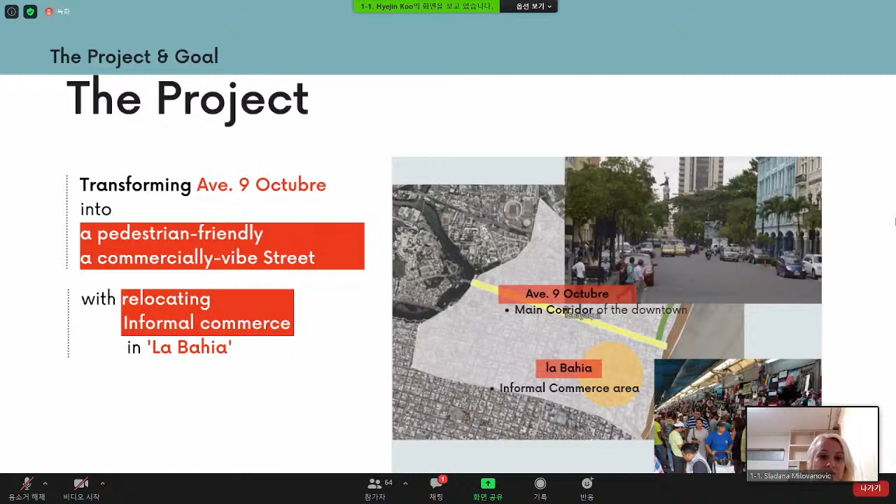The project is transforming the street into a pedestrian-friendly, commercial vibrant street with relocated informal commerce in La Bahia. The street is the main corridor of downtown, connecting attractions, companies, and administration buildings.

Project background: Guayaquil is on the coast of Ecuador, South America, and is the most important port in America, with a population of around 3 million people in 300 square kilometers. It is the main economic resource and financial center of Ecuador.

Guayaquil is a traditional harbor with vibrant commercial activity. Inefficient governments in the 80s and 90s generated urban problems: no institution, no urban planning, corruption, informal settlements, and informal commerce.

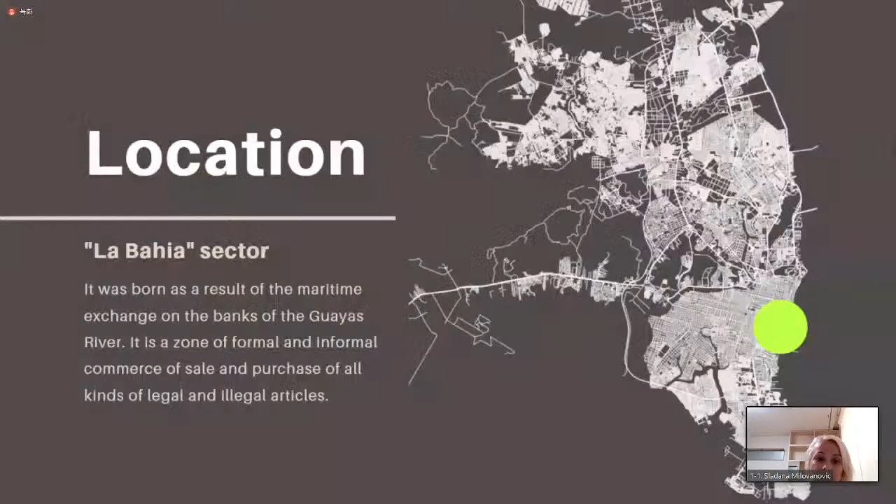In this context, La Bahia is a street informal market that occupies a large part of the city downtown. Our location is in the center of Guayaquil city, precisely in the La Bahia sector, near the Guayas River.

La Bahia is a zone of formal and informal commerce, selling all kinds of legal and illegal goods at very affordable prices. La Bahia is also located in the middle of the attractions in the central area.

The problem is that La Bahia's center has been losing its commercial value over the last decades, facing the advance of new zones of higher added value, making it necessary to revitalize this area. The idea to pedestrianize the downtown to enhance its tourist commercial value has long been supported by the municipality and the public.

There have been two successful regeneration projects in downtown Guayaquil. The first is Malecon 2000, a 2.5 kilometer riverside promenade with a cultural neighborhood including museums, galleries, and a shopping center. The second is Malecon del Salado, on the other side of downtown Guayaquil, a riverside park with a boardwalk and playground.

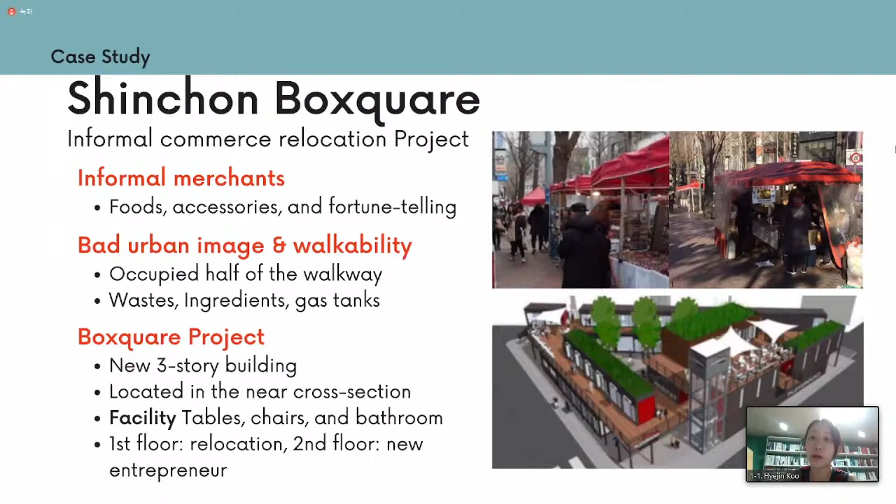We studied some Korean examples. The first one is the Shinchon Boxquare case. After relocation of informal commerce from Ewha Street, the area became more walkable and it allowed informal commerce to be more competitive. The second study case is the Yonsei-ro case.

The Sinchon area was depressed after Hongdae took on a young and trendy image compared to Sinchon. The research was successful: more people came to Sinchon, shop owners' revenue increased, and the number of car accidents sharply decreased.

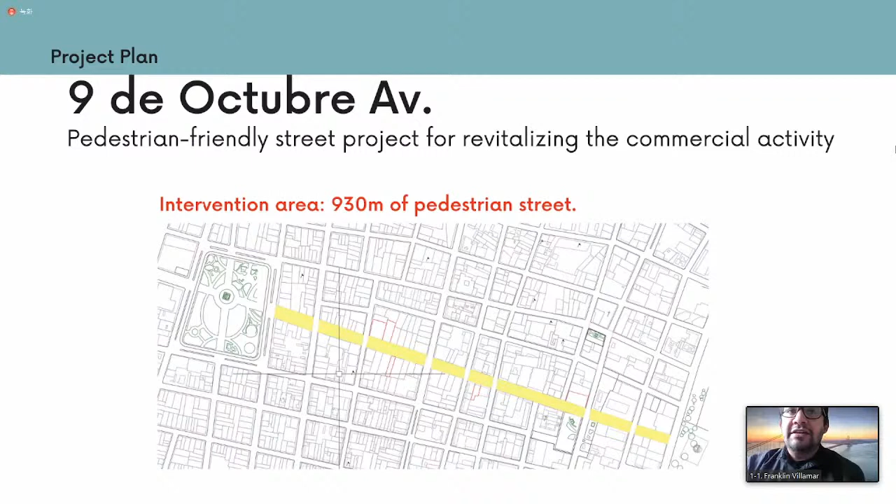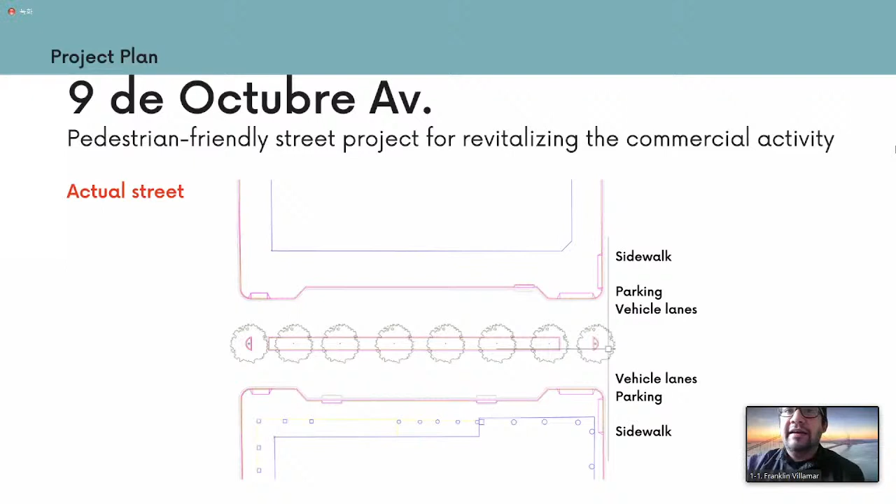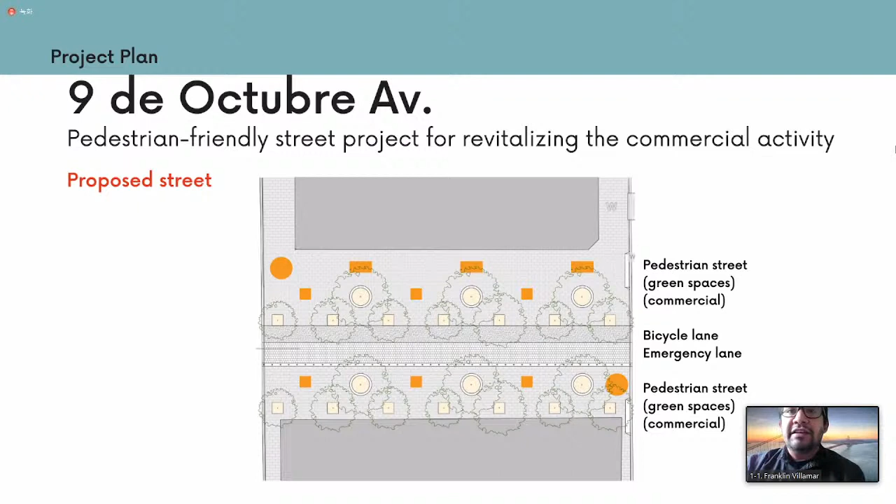This is the new distribution as a new pedestrian and walkable street with green spaces and commercial kiosks, bicycle lanes, and one emergency lane.

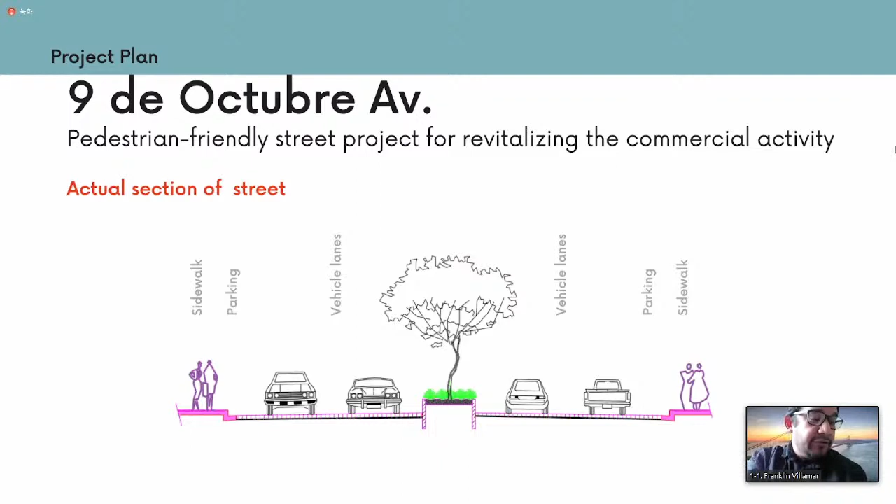This is the actual section of the street, which is a typical vehicular street. And we intend to make a new type of section.

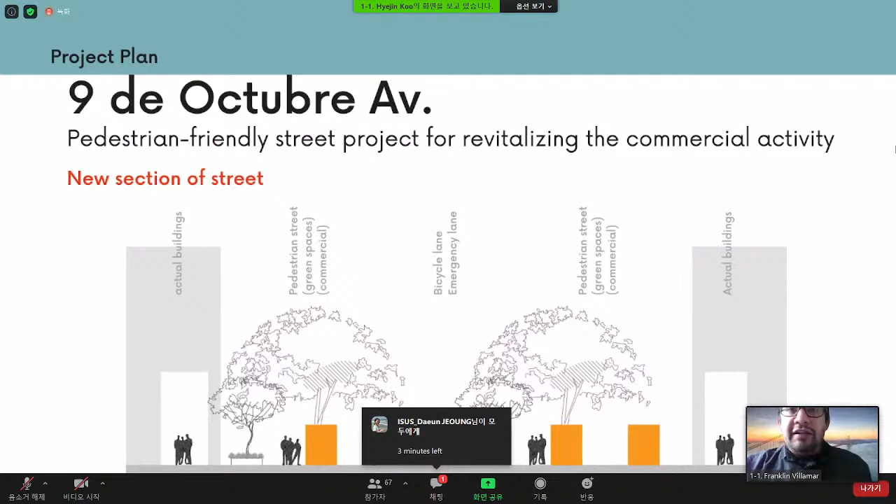Which places strong emphasis on the recuperation of green spaces and new commercial types. These are colorized sections of the new streets.

And this is the kiosk that we are trying to implement in the new commercial area for the merchants of the Bahia.

This is a brief budget that we present to you. The cost of the project is around $2,500,000. We intend to serve in the first stage 160 merchants, and the average rent for each kiosk is around $80. As for the rest of the values, we intend a return on investment over a period of 10 years, not only through the annual rent from the merchants, but also through the legal betterment levies tax, which allows the municipality to impose taxes on the inhabitants served by the project.

So the final goal of our project is to transform the city downtown into a pedestrian zone which serves urban commerce through a network of pedestrian avenues. We are using the super block concept, like in Barcelona.

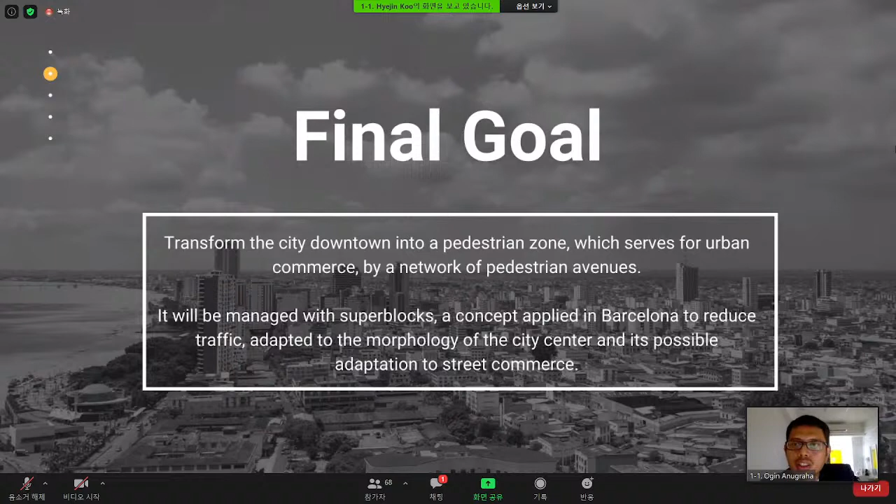And this is the super block that we propose for our project. The super blocks project represents an innovative planning approach for addressing urban challenges such as mobility, public space, biodiversity, and social cohesion.

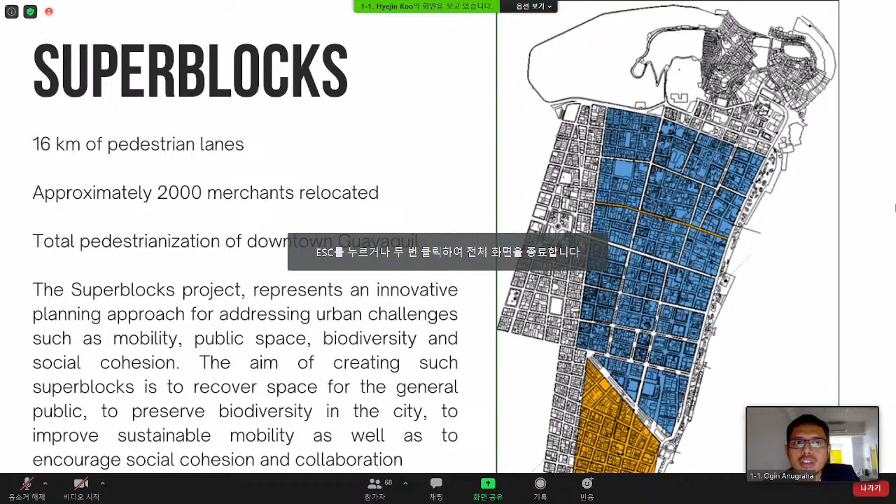With this concept, 2,000 merchants will be relocated, and it will also improve 16 kilometers of pedestrian lanes. Our vision for this project is to transform it into a pedestrian-friendly and commercialized zone. Thank you.

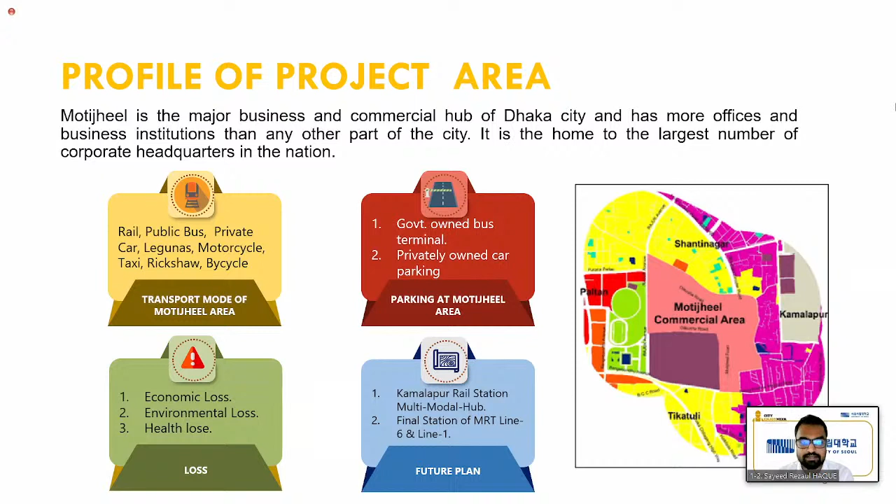So government has plans to build a multimodal hub at Kamalapur railway station, the end station of Metro Line 6 and Line 1. This will also increase the demand for parking in that area.

So to mitigate these areas' parking challenges by developing a multi-storied parking facility, our objectives are: increase the parking supply, safe and secure parking facilities, and reduce traffic congestion. The project will be developed by Dhaka Transportation Coordination Authority, and we hope that it will be managed and operated by Dhaka South City Corporation, because this area is located in that city corporation.

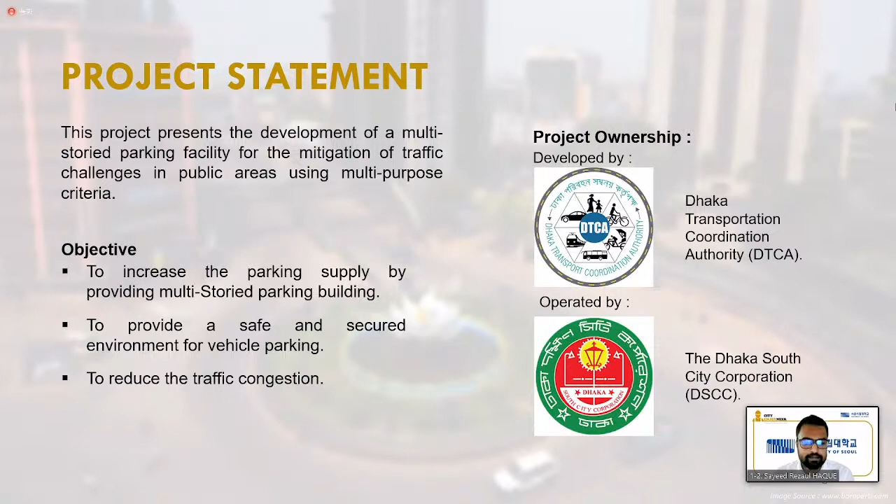Japan has advanced automation technology. Multi-storage parkings and bicycle parking facilities are very well established. Automated parking facilities entered practical use in the 1960s. In Kuwait, this is the largest mechanical parking lot in the world, located in Al Zahra. It has a parking space 3.5 times the size of the parking tower.

In Korea, I use this smart parking and I have to pay 1,000 won per 10 minutes. I think it is located in Gangnam, so parking fees are expensive. As an advantage, it is a parking lot designed to park the vehicle by rotating the cage, particularly left and right, after the vehicle enters the parking lot, usually called vertical rotary. It is easy to install in a small area and has few ports because it is a simple circular circulation method. It is very simple to use and can be operated by the driver without a separate manager. It is easy to move and reinstall the parking lot, so it has a very high efficiency value compared to the narrow area. Septian, please.

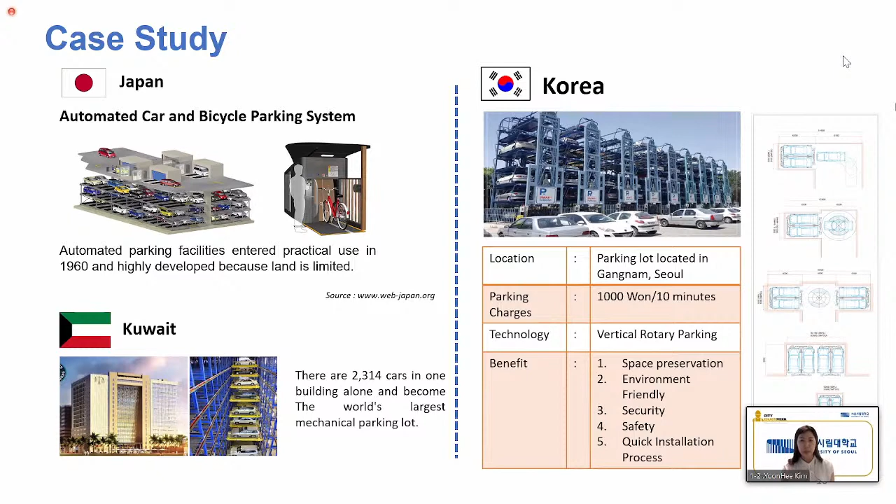Yes, thank you, Yoon-hee. I will continue the presentation about the concept plan. We will develop this parking in Motijheel CBD Dhaka with the integrated smart parking concept. We have four main concepts.

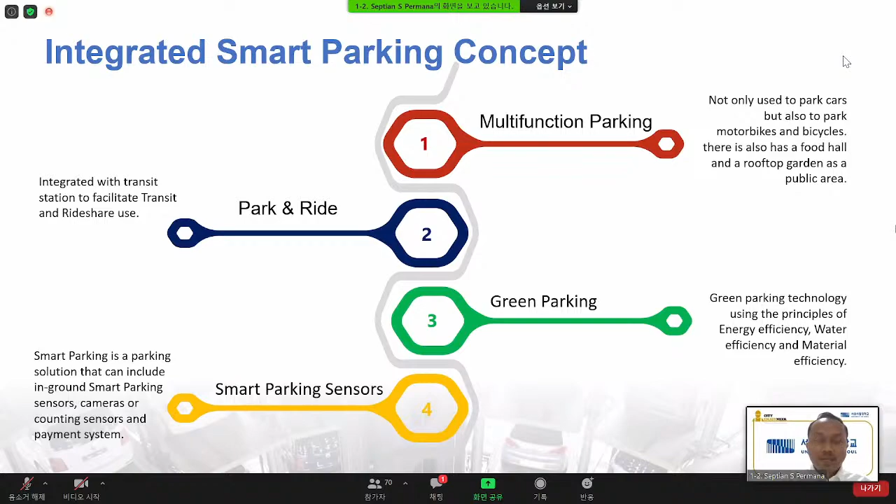First is multifunction parking, not only for the car, but also for the motorcycle and bicycle. Also, we will develop a public area, like a park. The second is park and ride. This parking is located between stations, so we will use the park and ride concept integrated with a transit station, and green parking using green building technology.

And the last one is smart parking sensor. We use sensors for counting the availability of parking slots and also for the payment system.

We will develop this concept with several implementations. For multifunction parking, we will develop parking for cars, motorcycles, and bicycles, and we will construct a rooftop park for public area and also a food hall for developing the local economy and community, along with park and ride. The location is between public transportation and the CBD, and we want this parking to become an important facility for making things easier for people.

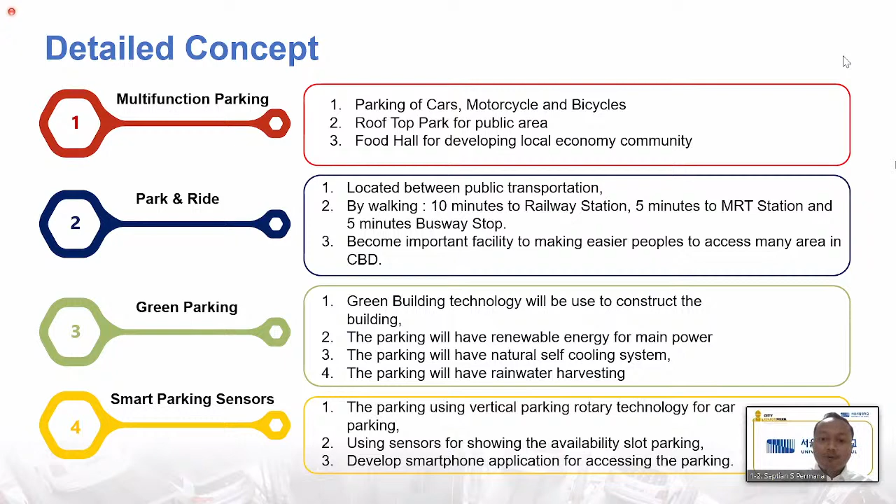Green parking: we will develop this parking with green building technology, with renewable energy, a natural self-cooling system, and rainwater harvesting. The last one is smart parking sensor: we developed the parking using vertical parking rotary technology as in Korea, and second, using sensors for showing available parking slots and a smartphone application for accessing the parking.

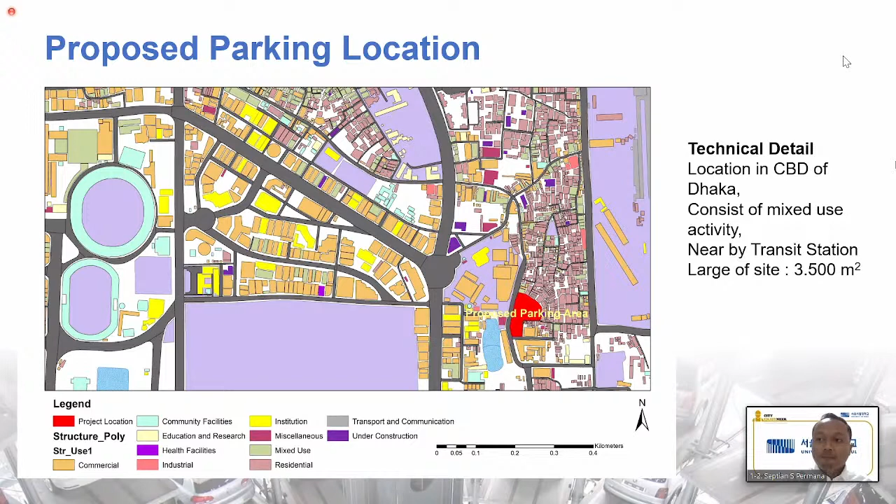This is the proposed parking location. As you can see, the red one is the proposed parking area located in the CBD of Dhaka, and the site is 3,500 square meters.

This is the design concept. We will develop the parking with 4 levels of car parking, 1 level of motorbike parking, and 1 level of bicycle parking, using vertical automatic car parking technology.

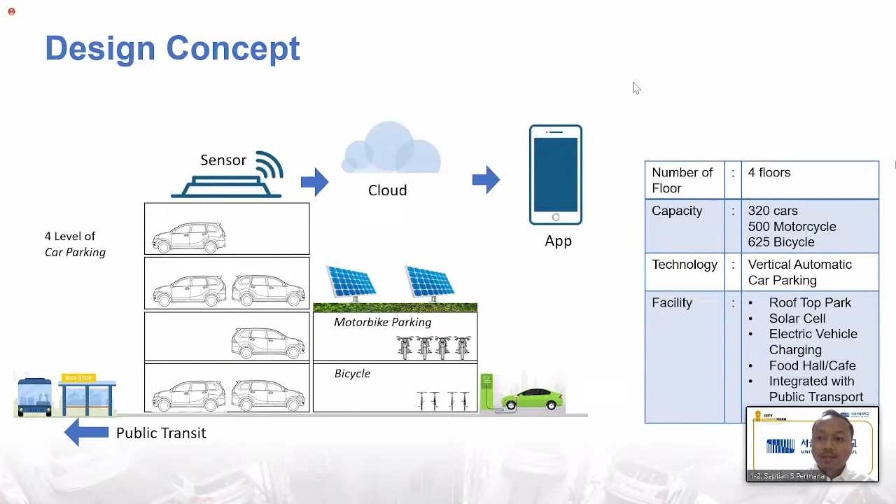For the financial analysis, Souksamai will continue. For the financial analysis, from the first year to the third year, there is investment on construction cost for the car, motorcycle, and bike parking. On the 4th year, we have operations.

As I mentioned, from the first year to the third year, there is investment for the construction cost for car, motorbike, and bicycle. The fourth year is operation. But if we invest in this project, interest will be incurred starting from the seventh year.

For the project plan, we use a timeline of 5 years, starting in 2021 and continuing through. The details include the preliminary feasibility study, comprehensive development planning, working design, construction, and operation.

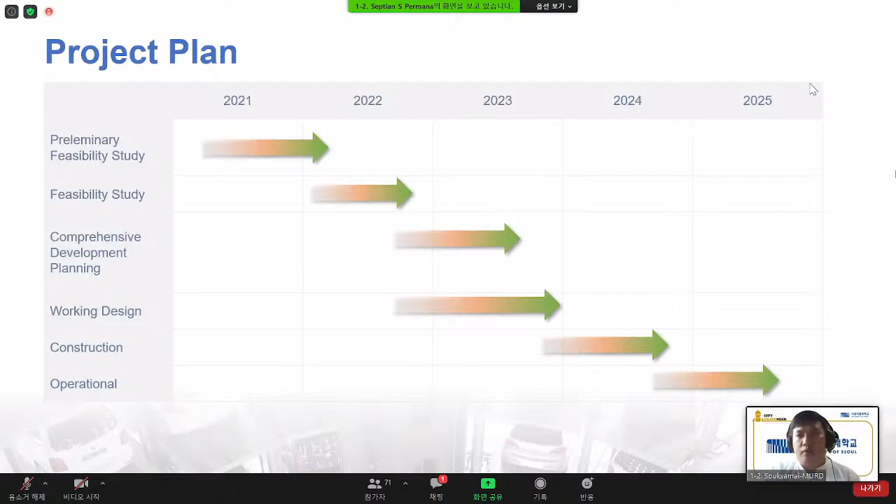Thank you Mai for your nice presentation. Now we are presenting our final outcome. Successful implementation of this multi-storey car parking will improve parking related issues, and the occupied road space will be freed. That will reduce congestion and increase vehicle speed. As a result, economic loss will be reduced, the environmental condition of the area will be improved, and it will also generate revenue for the operating organization.

This is our team photo from when we were developing this project. Thank you everyone for your kind patience and attention. Thank you.

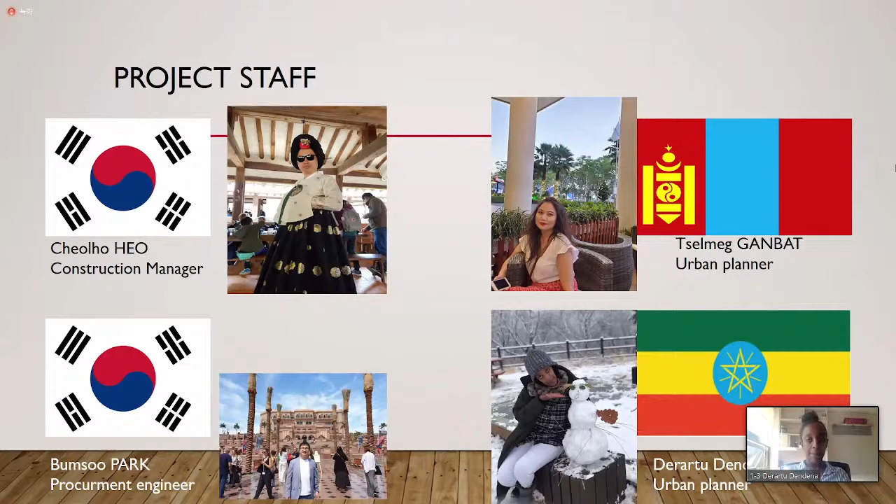Climate change has been a global topic since the late 20s, and we want to address this issue through urban regeneration. In urban regeneration, we would like to focus on the energy part, taking urban farming as a production of green energy, which is important for the environment.

In urban regeneration, among the various definitions, we have chosen to take the product of complex dynamics processes and physical, social, environmental, and economic transactions. This applies to our building.

In our building, we are going to address the economic, financial, employment, physical, housing, and social issues. Then we will design a physical building.

In utilizing unused and underused spaces, we would like to take land occupied by functionally obsolete non-residential buildings. We will discuss later what we mean by that.

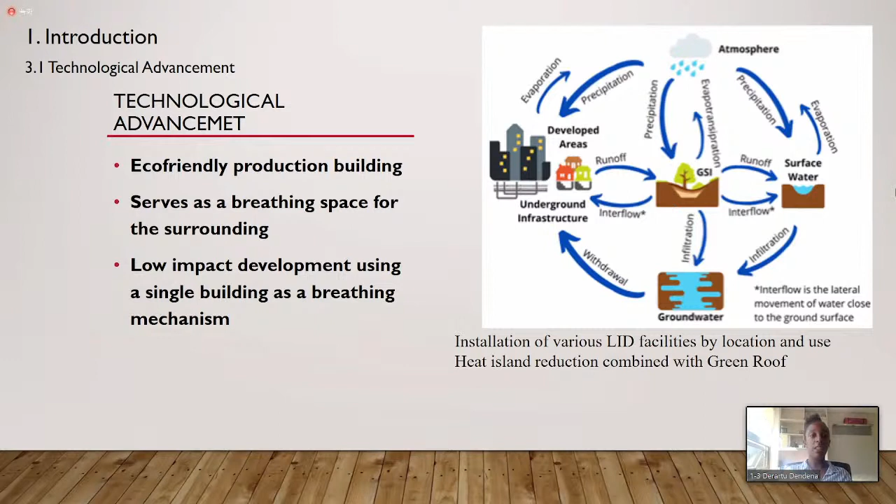We would like to bring technological advancements by using eco-friendly production buildings, serving as breathing space for our surroundings.

We would like to produce green energy, which is sustainable and reusable, to help keep the urban heat island effect down in cities. In an already developed city like Seoul, making more space for sustainable green energy is a future investment, and as we use this prototype in Seoul, it could also be used in developing countries.

The next part will be presented by my colleague Tselmeg. Thank you, Didi. Now I'm talking about this urban farming definition.

Vertical farming is the practice of growing crops in vertically stacked layers. It often incorporates controlled environment agriculture, which aims to optimize plant growth, and soilless farming techniques such as hydroponics, aquaponics, and aeroponics.

About the background and history: this greenhouse glasshouse technology developed largely in the Netherlands over the past 150 years. The concept was proposed in 1999 by Dickson Despommier, professor of public and environmental health at Columbia University. Nowadays, developers and local governments in multiple cities have expressed interest in establishing a vertical farm.

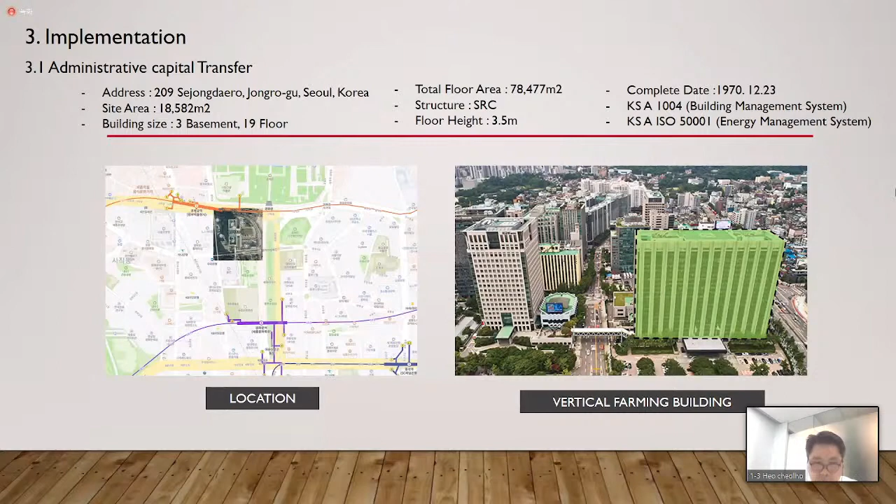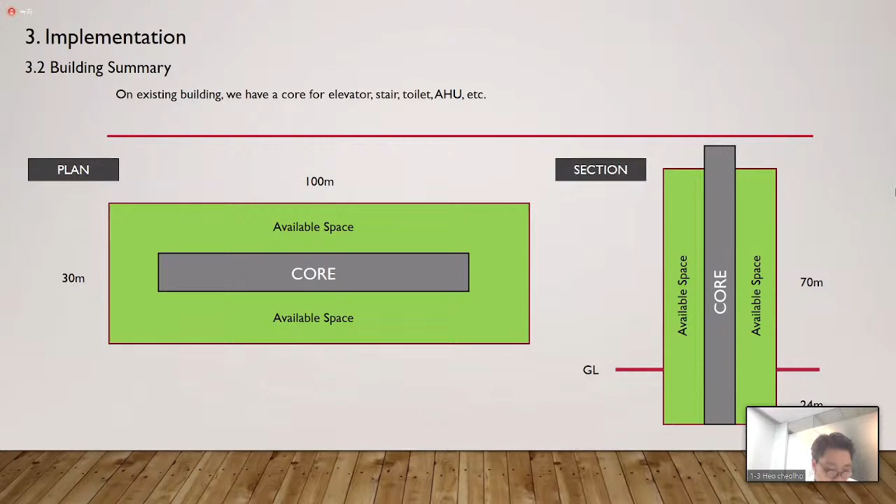If you check the 30-meter vertical section on a typical floor, the height of the available space is 2.5 meters, except the ceiling inside for MEP. The depth of the available space is 12 meters, excluding the 8 meter core size.

And the next step is to study the effectiveness analysis. Thank you. So from this page, we would like to speak about the effective analysis.

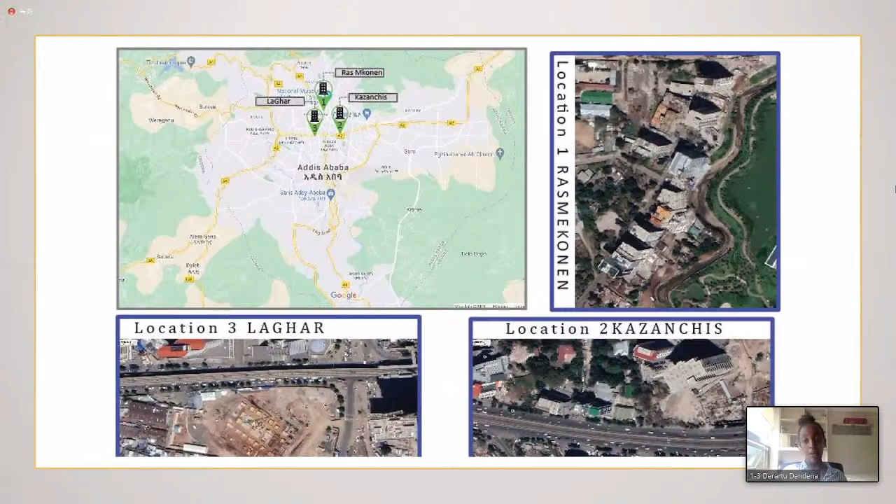We have 3 locations in the CBD area. Location number 1 is Ras Mekonen, location 2 is Kazanchis, and location 3 is Laghar. All 3 are in the CBD area and also open spaces, so we could literally copy and paste this project.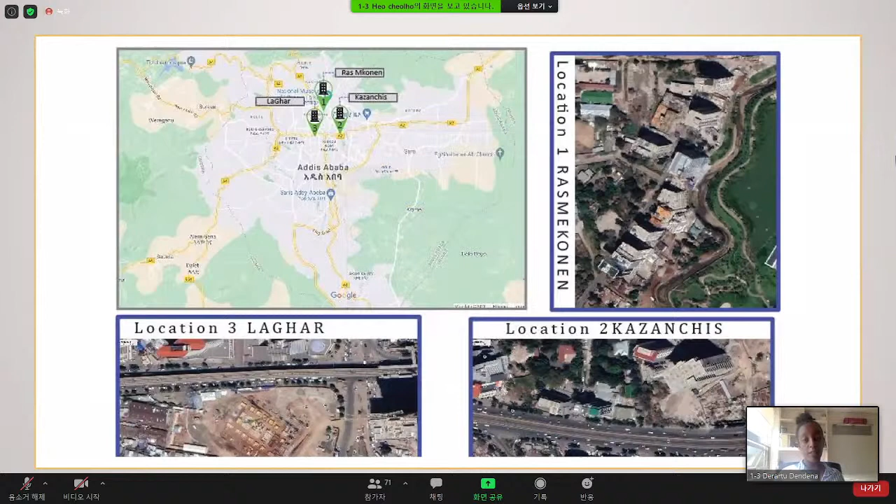We can build this green vertical farming. In conclusion, green regeneration not only regulates urban ecosystem dynamics, but also makes cities advanced and competitive. By stepping ahead, we can make our city a future city. Any city this project is applied to would be a future city.

The legal and institutional basis could be set depending on Ethiopia or any other country implementing it, and monitoring and evaluation would best be done by respective stakeholders. In our case, in Addis Ababa City, the Green Development Office would be the project owner. Thank you for your time.

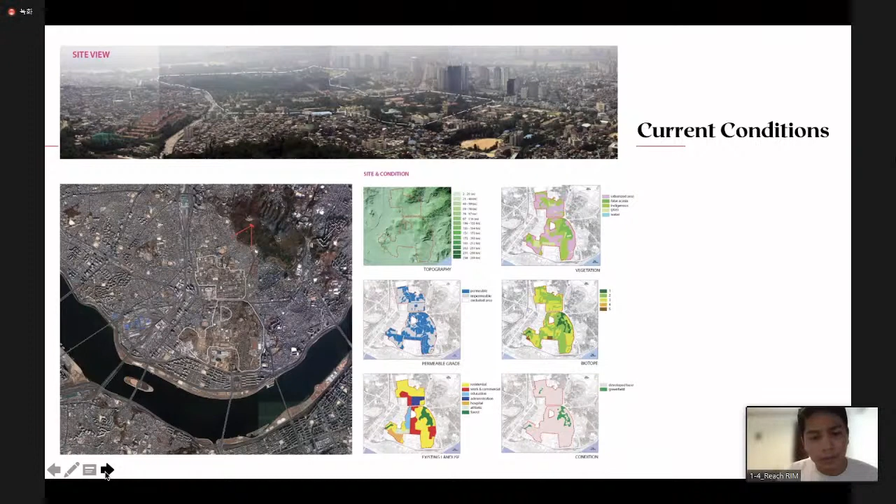Here is the master plan. We selected from best practice and designed based on Korean examples. We analyzed the costs, and designed the greenery development direction based on existing conditions, as well as planning the linked green development direction.

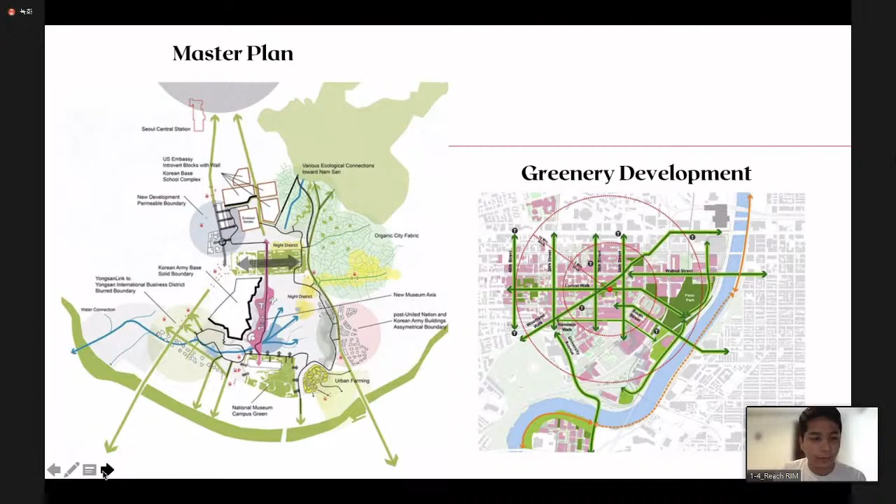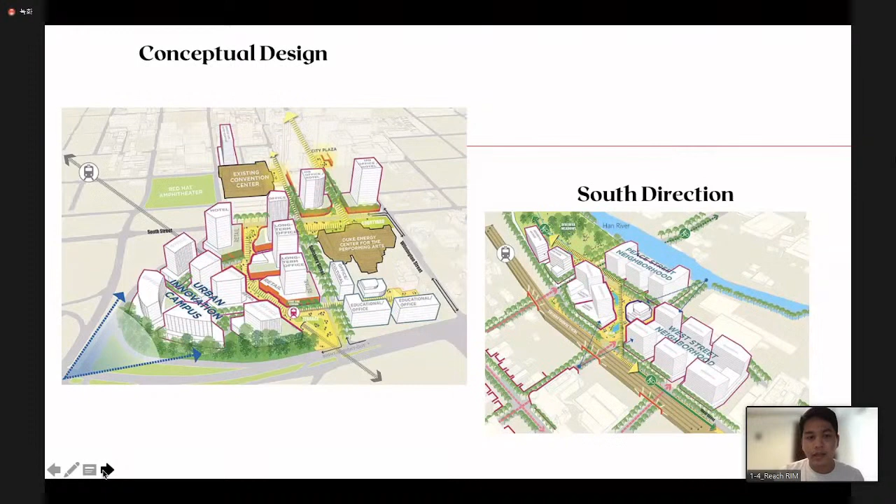Our conceptual design includes building permits and building regulations based on area - the area close to the Han River will have lower buildings than other areas, providing better views and open space to other buildings.

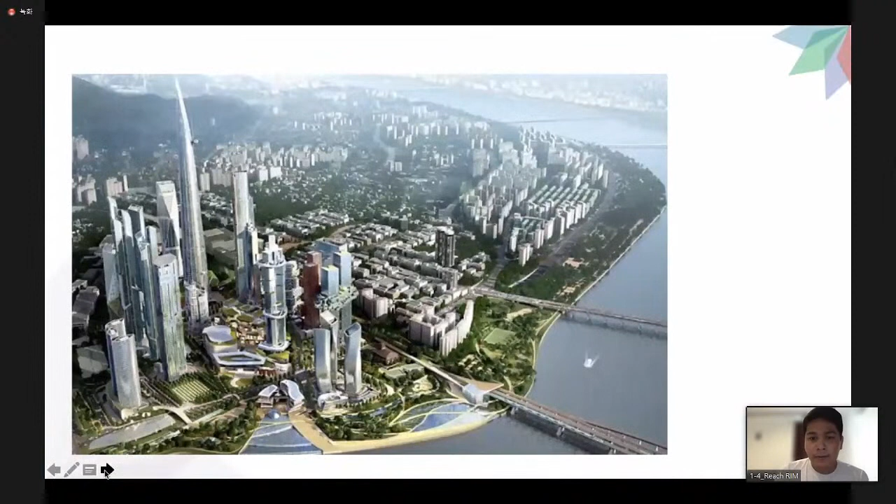Thank you, Reach. I want to explain more about the management for this project. This project will be carried out using 2 contracts: first, the engineering, procurement, and construction, or EPC contracts, and second, operation and maintenance, or O&M contracts.

In terms of financing, construction will involve utilization of government budget, including private capital such as sponsors or loans from banks. For the land that provides the project, it is based on landowner and installment sale agreement from the facility buyer.

We have estimates about the cash flow, and we hope that this project will continue according to the prepared scheme.

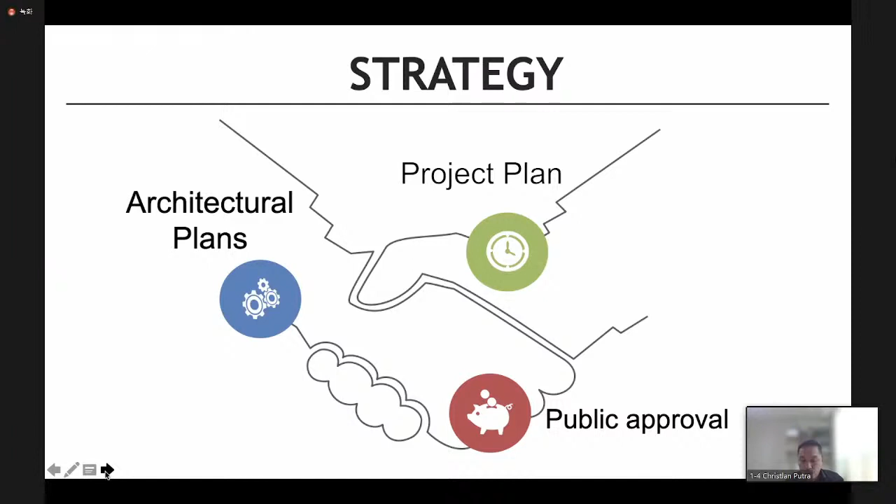With this project, our group will be under the Seoul Metropolitan Government, having a team role of design and project plan creation. On the other side, SMG will formulate the schedule and budget of the project. We can hire people for monitoring implementation, and they will do reports on updates for the project. We also plan to hire people in companies or private organizations for management and construction.

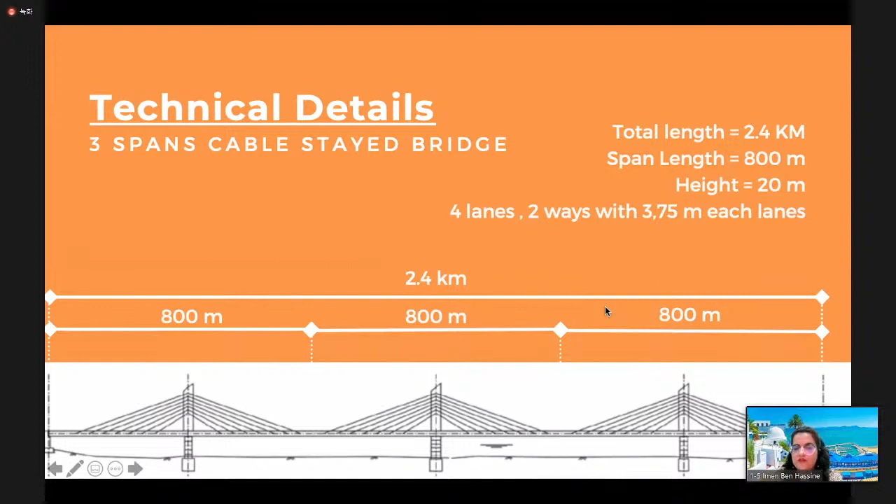For the technical details, after different economic and technical analyses, we chose a 3-span cable-stayed bridge with a total length of 2.4 kilometers. Each span has a length of 800 meters, with 4 lanes, 2 ways, at 3.75 meters each lane, as shown in the graph. The aesthetic aspect was also very important to increase tourism for Jerba, making this bridge an attraction for the island.

For the project proposal time framework, we chose the base year as 2021. The opening year is 2025. The final year of analysis is 2049, making it a total operation period of 25 years.

Now for the economic analysis, in a traditional cost-benefit analysis, most of the time we take into consideration various kinds of costs and benefits. But for our project, we only take into consideration 3 costs.

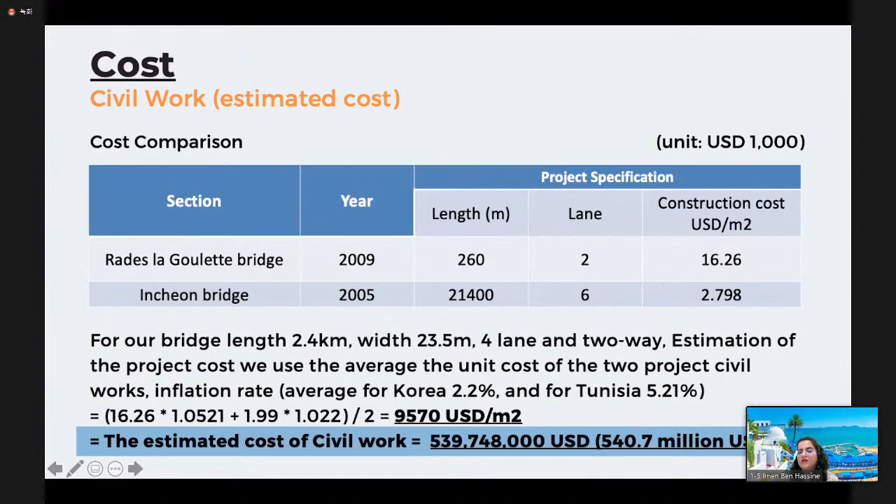The first cost is civil work costs. For this, we based our calculation on 2 references: the Rades la Goulette Bridge in Tunisia and the Incheon Bridge in Korea, both cable-stayed bridges. We determined the construction cost per meter square, took the average, applied the inflation rate, and multiplied by the area of the new bridge. We came up with a total cost of $540 million US dollars.

The second cost we considered was land acquisition. We have a price unit of 71 per meter square, and the area was 35,000 meters square.

This gave us a total cost of about $2,500,000. Finally, the last cost is the automatic toll system implementation cost. We are adopting electronic toll collection for our project, and based on the Department of Transportation in the United States, the average cost per lane for this kind of system implementation is from $100,000 up to $200,000. We took an average for our project and multiplied by the number of lanes, which is 4, coming up with a total cost of $600,000.

As a summary of our cost, the total cost of our project ended up at $543 million.

Now my colleague Monica will continue. After calculating the costs of the project, we try to measure the benefit we're going to achieve after completion. The direct benefits we anticipate are the value of travel time savings, vehicle operating cost savings, and toll revenue. Besides this, we also expect development in the area and expansion of commercial area.

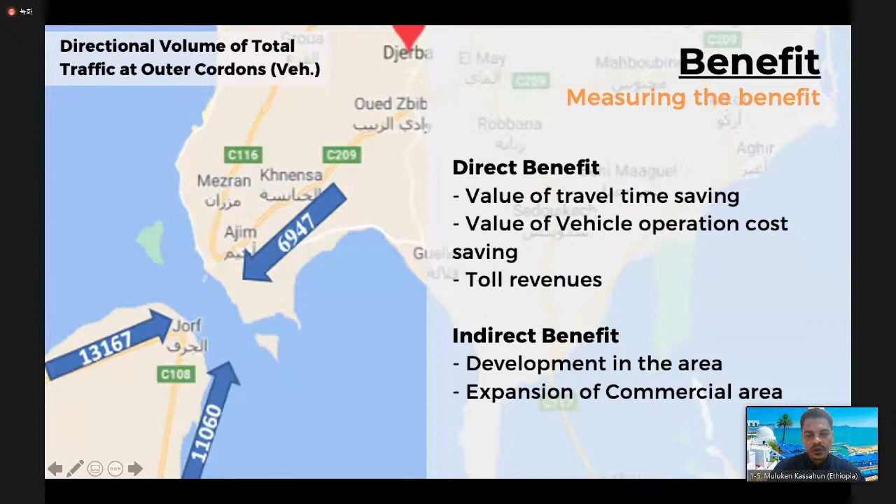When computing our vehicle operating cost savings, we developed a model replicating the current travel pattern of the area by building the OD matrix on the zone, and we forecasted the traffic.

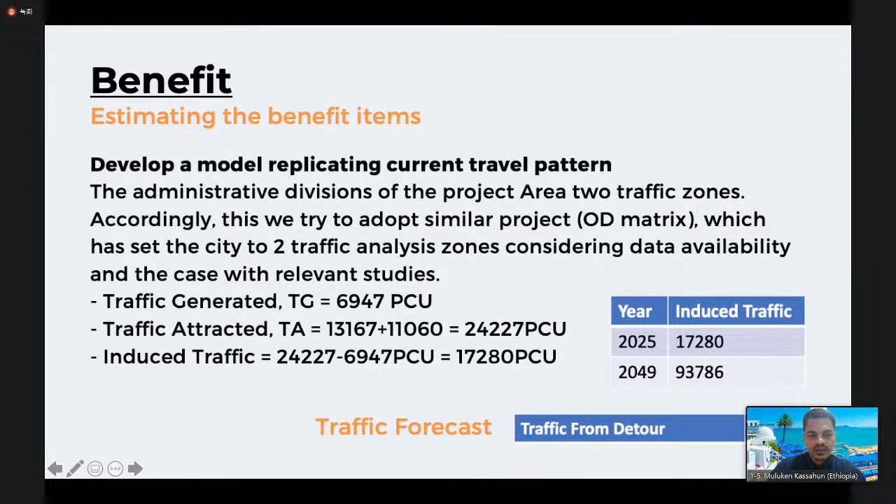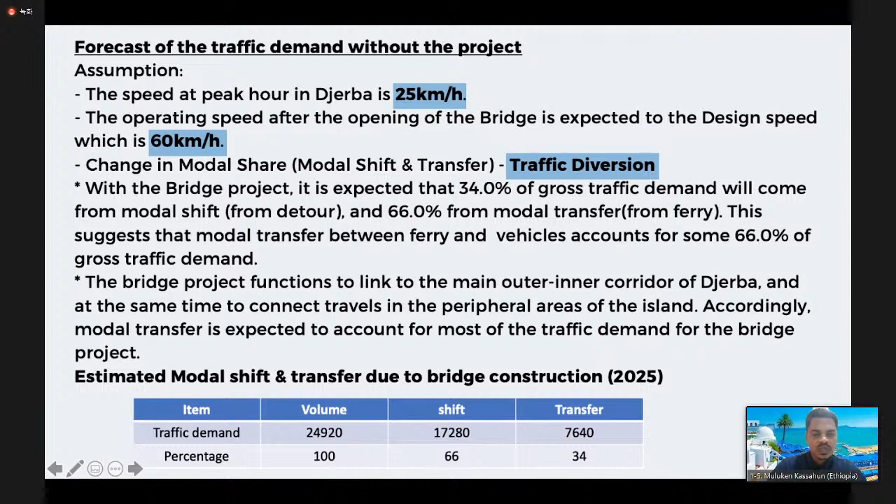During this forecasting and model development, we made some assumptions. The speed at peak hour in the Djerba area is around 25 kilometers per hour, and we expect it to increase to 60 kilometers per hour after completion of the bridge. Due to this, we expect a modal shift from the ferries and traffic diversions from other routes: 34% from other routes and 66% from the ferry will be diverted towards this bridge.

For computing the vehicle operating cost savings, we adopted the Transport Investment Evaluation Guideline of the Ministry of Land, Infrastructure and Transport of Korea, 2007, and used this model. We ended up with $52 million for the vehicle operating cost savings.

The travel time savings will be $13.13 million. For this computation, we used the Oregon 2030 report for the value of 1 hour travel time by vehicle class.

We also tried to monetize the toll revenue. Since it's a leisure type travel, we adopted the willingness to pay perspective, and we ended up with a toll revenue of around $29,000 per annum. Finally, we came up with a BC ratio of 3.6 and the NPV of the project, with a discount rate of 8%, of $51 million.

This makes our project more feasible.

This is now the financial structure and implementation strategy of our project. The financial structure of our proposed project is aligned with the pipeline of the PPP project in Tunisia, according to official government documents that have been revised during preparation.

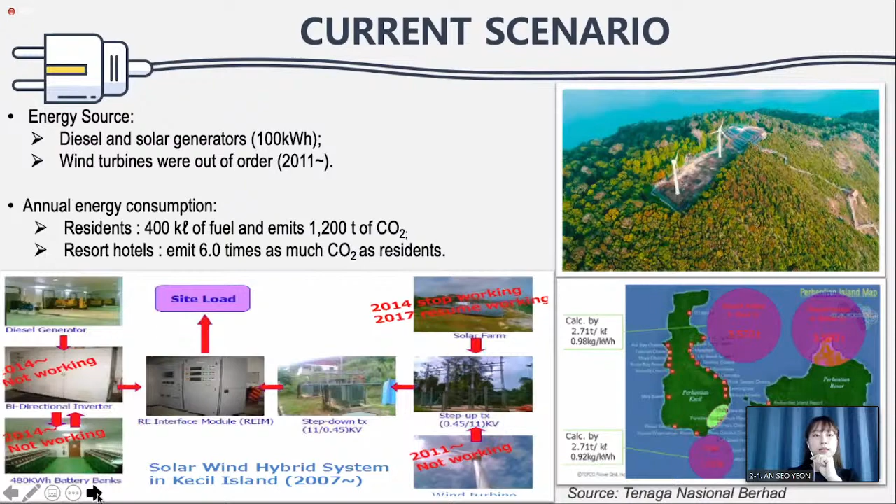Thank you, Sophie. For our project proposal, we thought of 3 ideas on how to overcome the situation in Perhentian Island. The first is to install existing-type solar panels on the rooftop of each household and resort on the island. The second is to install new solar panels in place of the existing ones, which have more efficiency compared to the existing solar panels. The third is to remove the malfunctioning wind turbine and install a new biomass plant and storage battery.

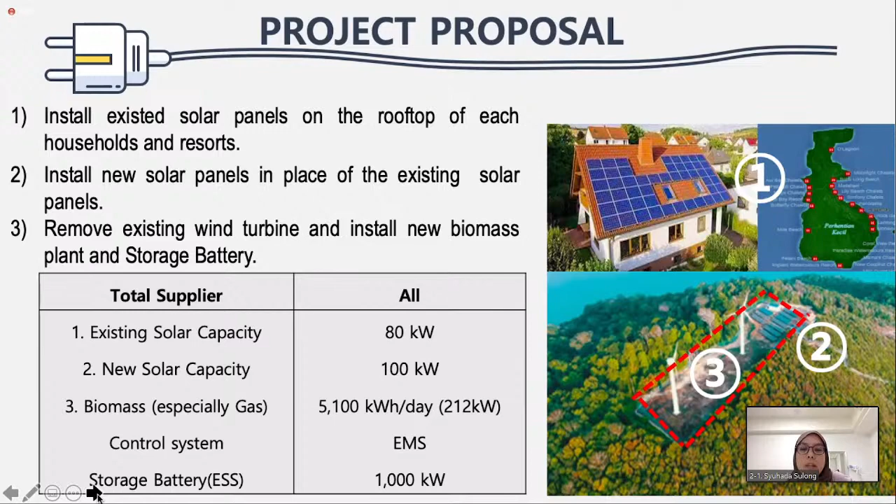For the first idea, the existing solar capacity is about 80 kilowatts, while the new solar capacity will have 100 kilowatts, and the biomass plant will have about 212 kilowatts, while the storage battery will cover about 1,000 kilowatts on the island. So this is our proposed hybrid system for the island.

For the solar panels, we have a distributed system from 20 to 10 watts, which we plan to install in parallel so that it can be easy to add. And for the charger, we plan to have automatic switching to a spare system in case of failure, so it'll be easier for operation and maintenance.

For the inverter, we plan to have operation in order according to the increase of electricity demand on the island. We plan to have a dual system in case of blackout in the operation system. For the battery bank, we plan to have a rack type so that it can be easily added in parallel. For the communication interface, we have a real-time monitoring, control and analysis system on the island.

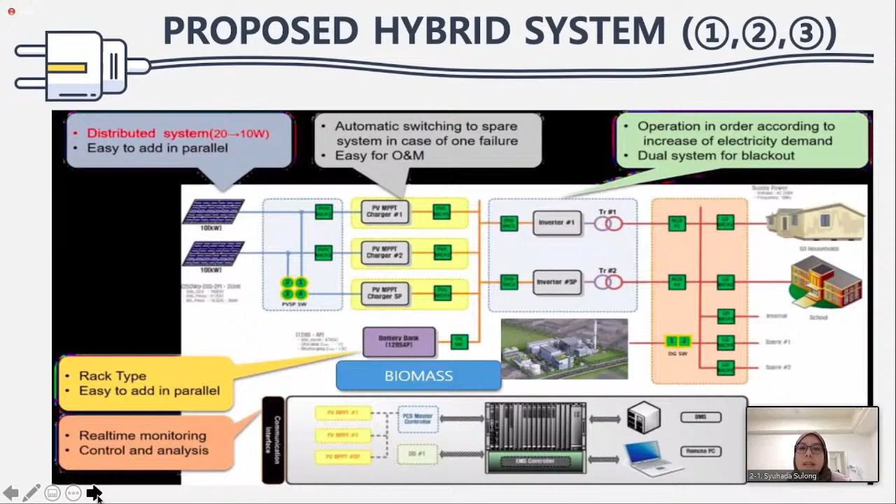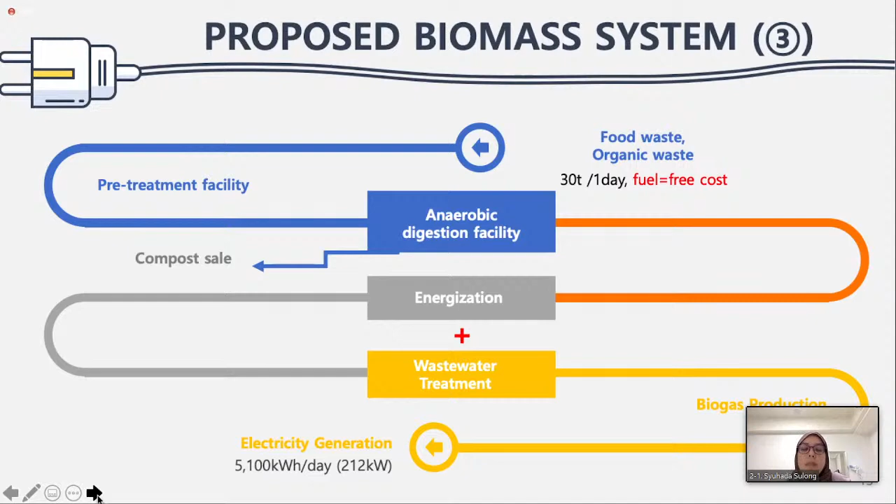For all the proposals we plan to do, it comes to about 18 million USD. The most cost comes from the construction of the biomass power plant, however, since we want to reuse the waste food and organic waste, the fuel for the biomass is free. For the solar panels, the new solar panels are about 100...

...hotels, resorts and households. For the cleaning, it's about 21,000 USD. For the reconstruction of...

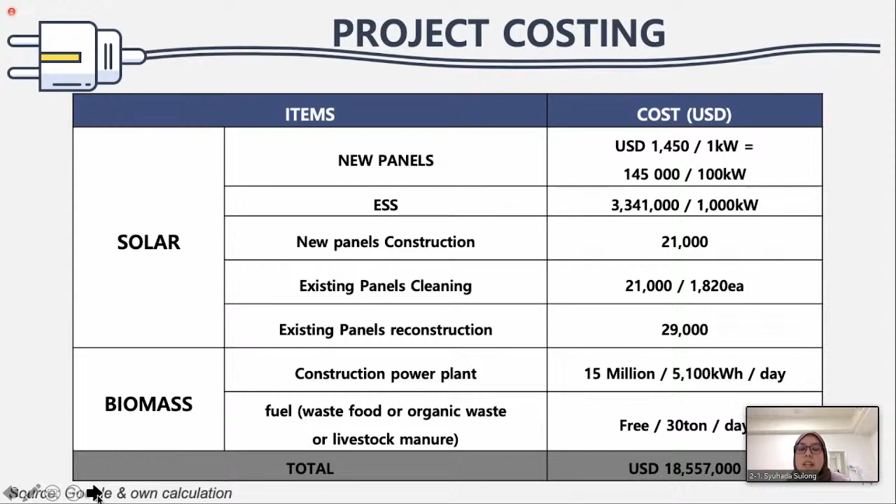Sorry, we cannot hear you. Can you hear me? Oh, yes.

So for the financing model, we thought about 2 options. The first option is to have loans from financial institutions such as ADB or World Bank, so that it can be loaned by the Malaysian government in order for us to execute this plan.

The second option is a special purpose company, so that we can get investment from local and foreign investors in order to construct the facility and for the technology investment, so that upon completion of the project, the competent authority, which is the Energy Commission, will pay a usage fee to the SPC company. So next, Aung.

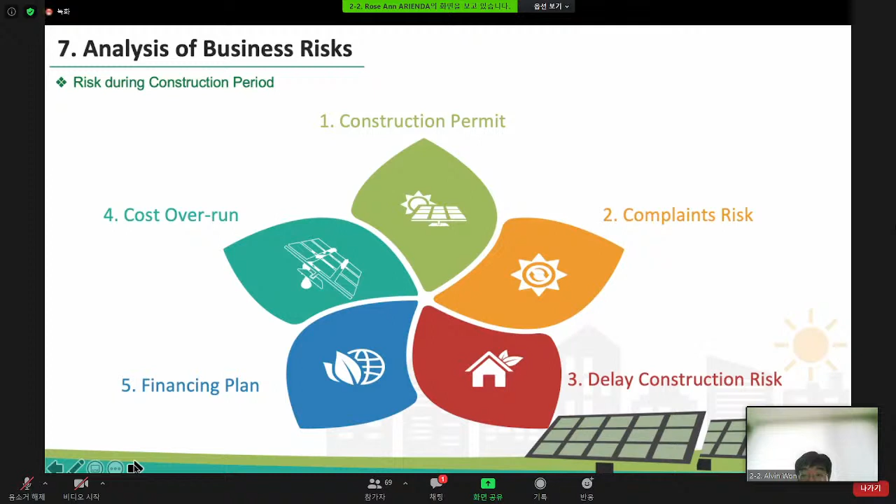The risk factors expected during the start of this business are construction permit risk, complaints risk, delay in construction, cost overrun, and financing plan risk.

The risk factors expected during operation are government policy risk, offtake credit risk, O&M cost overrun, and force majeure.

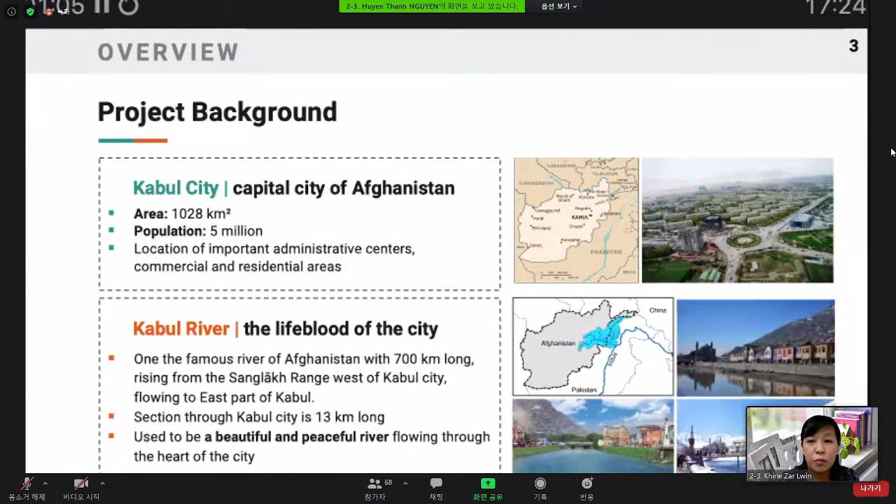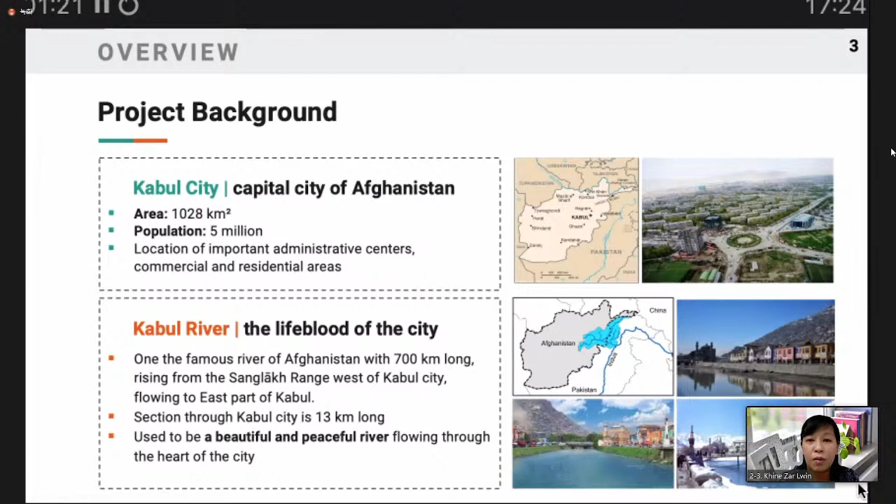Kabul River is the lifeblood of the city, beautiful and peaceful, flowing through the city - you can see the river map in the second photo. It is famous in Afghanistan, 700 kilometers long with 13 kilometers running through Kabul city. It rises from the Sanglākh Range west of Kabul city and flows to the eastern part of the city.

Let me continue with the problem statement of the river. The first corner photo shows the Kabul River in 1982, and the next photo is from 2006. The population has increased 5 times.

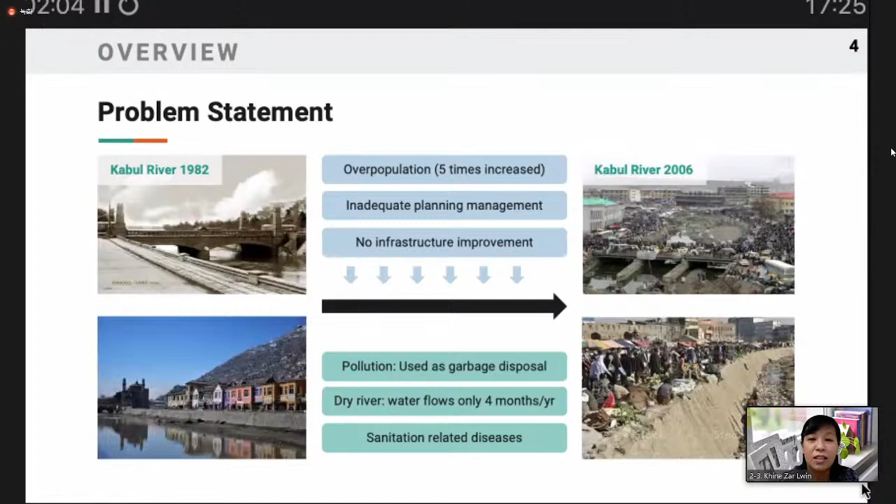Even though the population has increased, there is no infrastructure improvement, indicating poor planning management. People use the river as a garbage disposal, and it has become polluted. The river is seasonal and dry, with water flowing only 4 months out of the year. This is related to sanitation, diseases, and also flooding problems.

Next part, objective, will be presented by my friend Darabul. Yes, thank you. I'm going to present about our objective.

From the expected outcome part, we can expect that with this project we can improve access to the sewerage system. Moreover, the project can improve the living environment of the people around Kabul city. On the other hand, the project can also increase public space and cultural promotion. And the last expectation is to contribute to the national economy through tourist and commercial income.

Yeah, and the next slide is my teammate Thanh. Well, I would like to present about our project description.

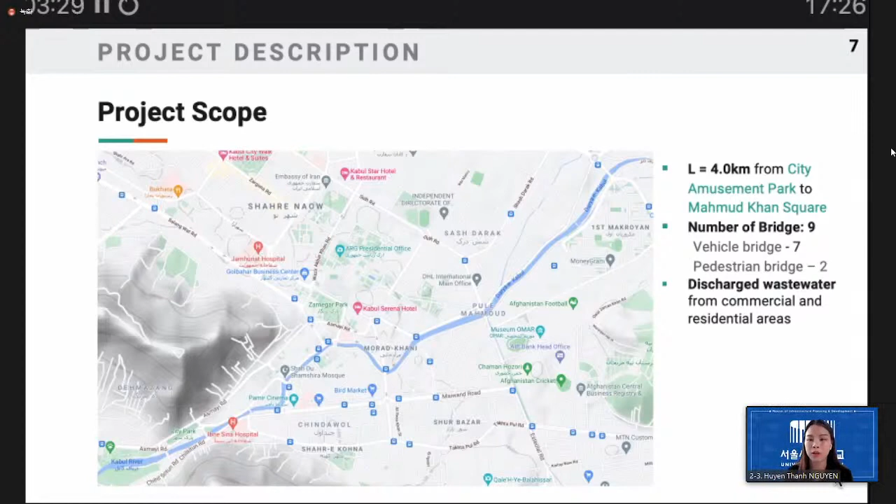The scope of the project is 4 kilometers long, from City Amusement Park to Mahmud Khan Square, which is the central area of Kabul city. Along the river there are 9 bridges, including vehicle bridges and pedestrian bridges. In the river basin there are commercial areas with many markets and commercial buildings, a presidential area with presidential office and embassy offices, and in the downstream of the river is the residential area.

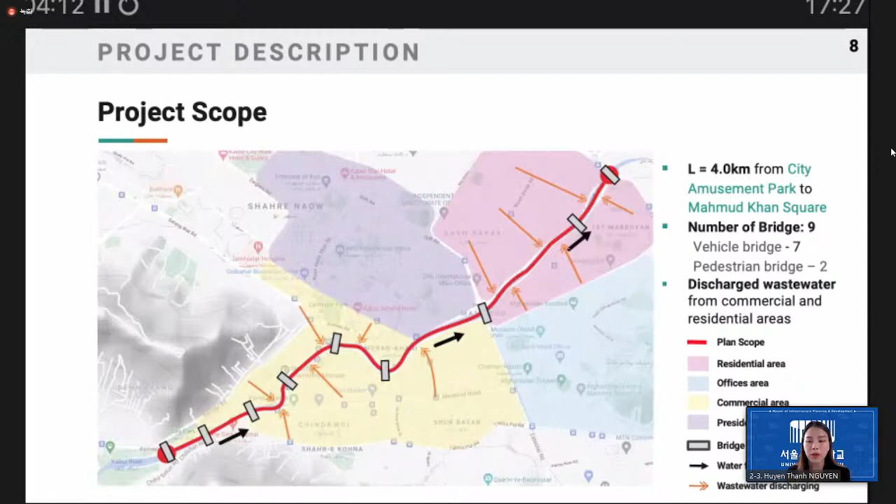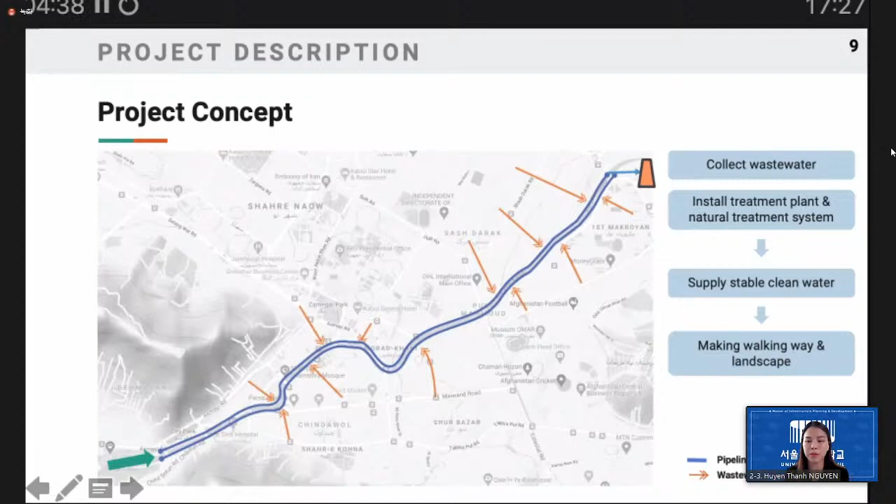It can be said that the pollution situation mostly comes from discharge water from the commercial and residential areas. From that awareness, our concept is to build sewage pipes along the river to collect wastewater, install a treatment plant downstream to treat the water before discharging it into the river, install a natural treatment system using plants in the river, and also supply stable clean water with walking paths and landscaping to make it an attractive tourism place.

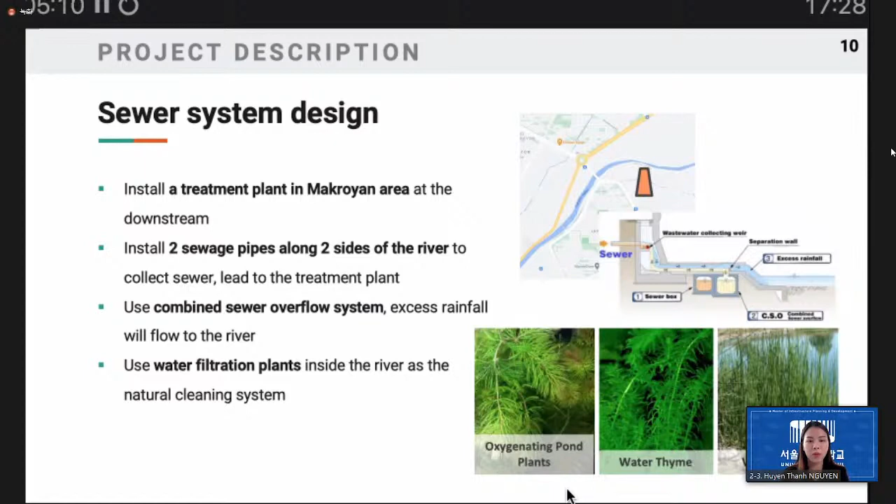First, regarding the sewer system design: we will install a treatment plant downstream, and install 2 sewage pipes along both sides of the river leading to the treatment plant. We will use a combined sewer overflow system in which excess rainfall will flow to the river, using water filtration plants as a natural cleansing system, such as oxygenating pond plants, water thyme, or vertical grass.

About water supply, we would use water from Shahtoot Dam and underground water.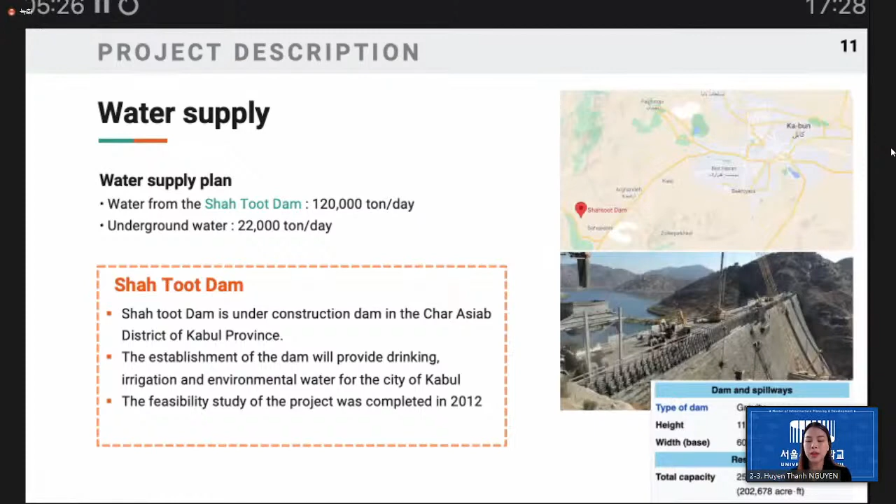Shah Toot Dam is an under-construction dam with a plan to provide clean water to the city, ensuring the water resource for the river. For the landscape design, we will make a 2-level walking way with a high water level that secures the stream capacity of 100 years flooding.

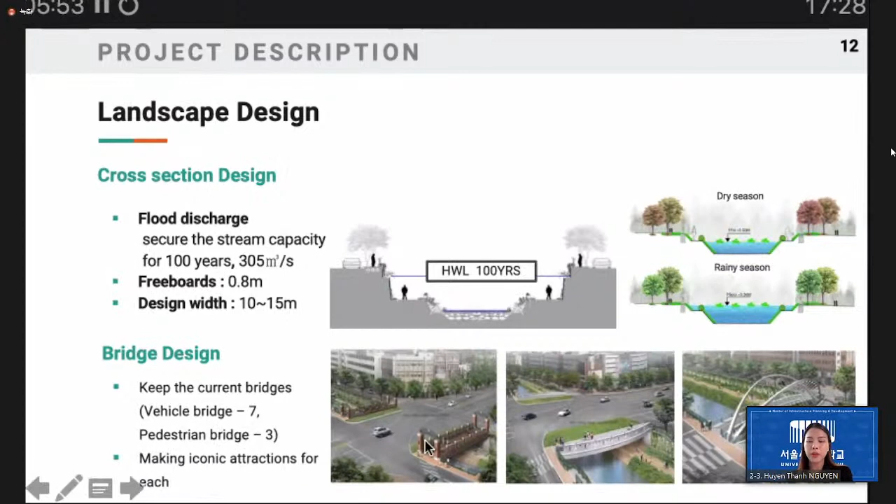In the dry season it can be the walking way, but in the rainy season it can be the way for flood water. For bridge design, since we already have current bridges, we can use them to make iconic tourism attractions without building new ones.

Thank you, Nixie. The project will be implemented using existing organizational structures, incorporating lessons and experience gained from other similar operations. The timeline plan totals 27 months, with 1 pre-stage feasibility study and 3 main stages: site preparation, construction work, and water supply management from the implementation plan.

We calculated the project cost based on the Cheonggyecheon case study project, adjusting for currency rate, labor price, land price, and project scale differences between the two countries. The total estimated cost is $342 million, with components including feasibility study, site preparation, supervision, and installation, in which construction cost occupies 81%.

For the finance plan, the project cost will be financed by the government of Afghanistan and donors, in which the government will cover 20% and 80% will be donated from a multilateral development bank, JICA, and USAID.

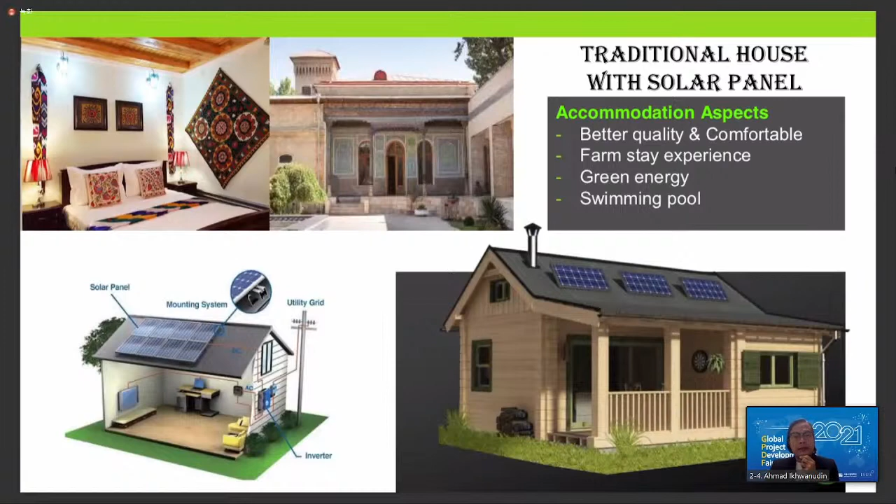The expected outcomes of the project are to establish the first agrotourism in Charvak. Currently, there is no agrotourism yet in Charvak, and if the project succeeds, it can become a model for other regions in Uzbekistan. This project will also give an option and diversify tourism in Charvak and Uzbekistan.

It's expected to increase the number of tourists and maximize revenue from the tourism sector. Finally, through this project, we expect to improve and sustain the local economy. We hope the local community will gain benefits from these tourism activities.

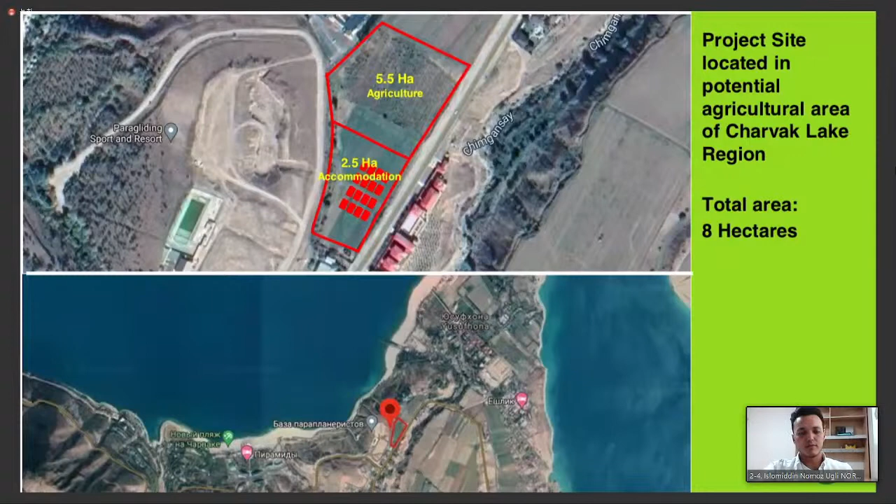Why did we choose this place? There are more than 50 hotels and tourist attractions on Lake Charvak. The climate and land area of the region specialize in agriculture and tourism. There are already more than 200 farms in the area, and these farmers only grow fruits, vegetables, and agricultural products. According to a survey conducted by the Ministry of Tourism of the Republic of Uzbekistan, foreign and local tourists have approved the implementation of agritourism projects in this region.

Project financing is carried out in the following form: 35% is financed by the special purpose company, and 5% is subsidized by the government of Uzbekistan under the tourism development program. 60% of the project cost will be financed by international financial institutions, for example, World Bank, IDB, USAID, Korea EDCF, Asian Development Bank, and others.

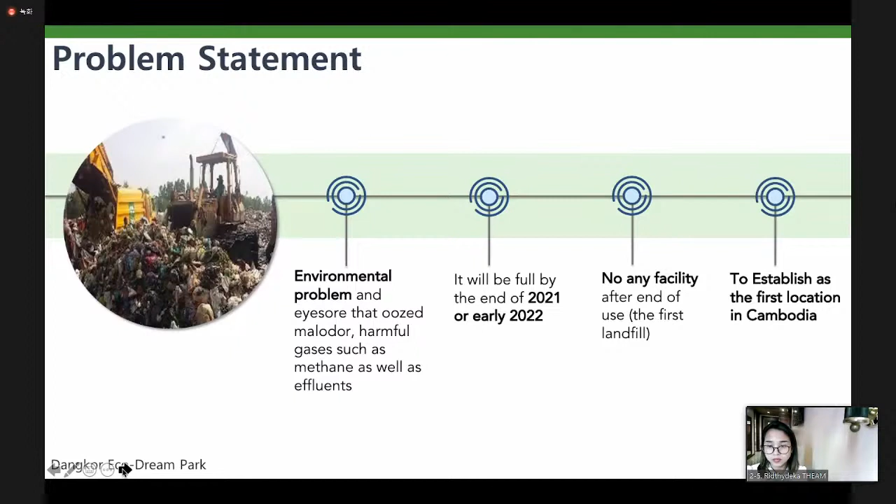The total surface of the landfill is 31.4 hectares, the second one in the city under management by Phnom Penh Capital Administration. The landfill cluster includes 4 pit areas for garbage disposal; areas A and B were completed 100%. Right now we are using pit areas C and D, which are the last pits for garbage storage.

According to the National Sustainable Development Plan, NSP aims to develop sustainable economics together with environmental, social, and cultural sustainability for poverty alleviation. This NSP aims at green growth, ensuring political sustainability and macroeconomic sustainability to reach a developed status for the country.

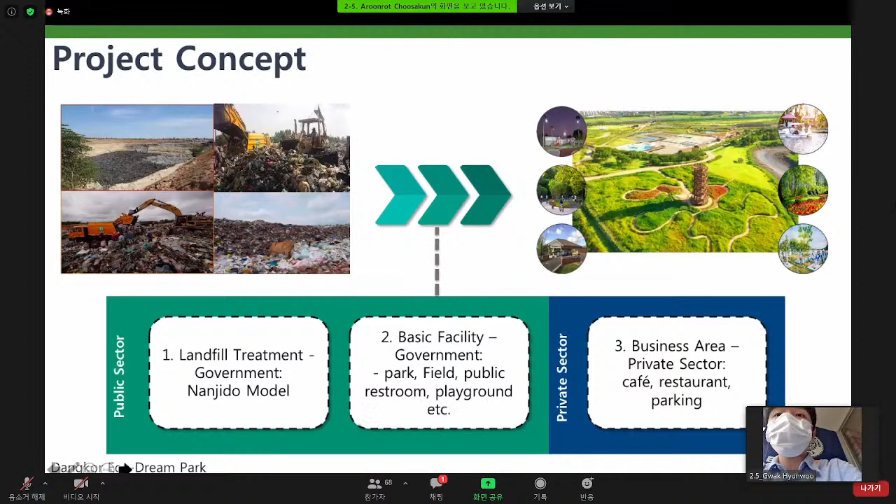Thank you, Smith. For the process of the project, as you can see in our timeframe, the project is proposed to be completed within 4 years for land treatment and facility construction. Operations and monitoring with this model will begin in the 5th year of the project, and the project will proceed with the business sector for 20 years.

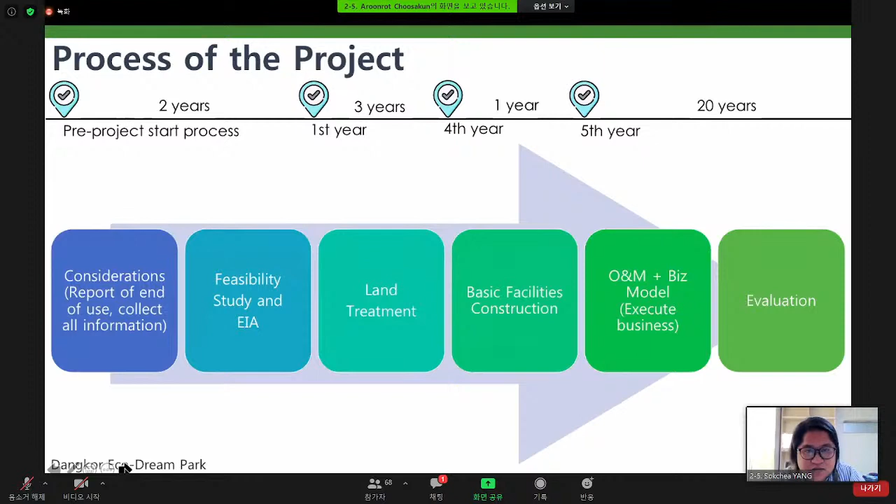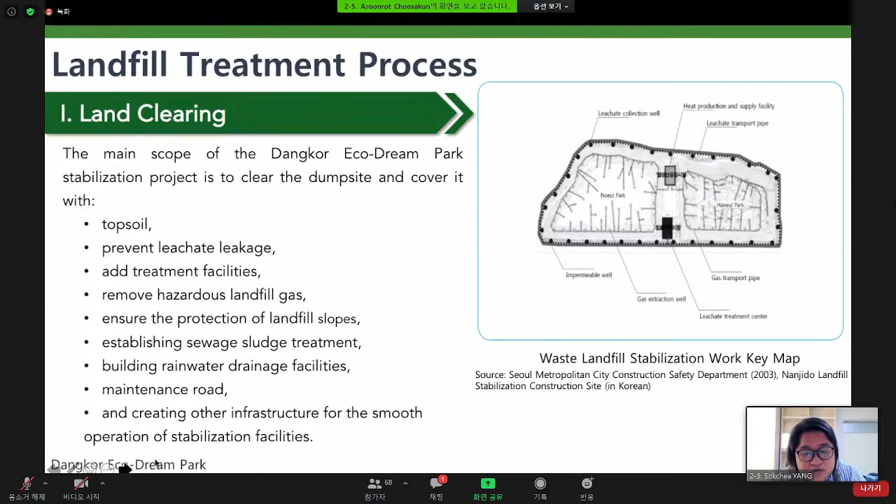For the stabilization work of the project, we follow the Nanjido Park concept as mentioned above. The main scope of Dangkor Eco-Dream Park is to clear the dump sites and cover them with a safe treatment facility, and create other infrastructure for smooth operation of the stabilization facility. Soils composed of mixed sand and sludge will be used to complete the site leveling of the upper part.

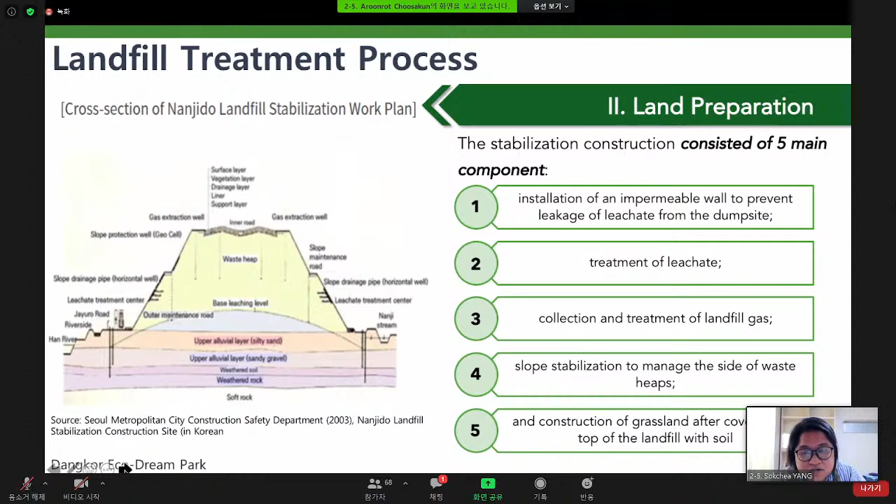For land preparations, after final covering, blocking, treatment, leachate collecting and treating, we start to move to the stabilization constructions, which consist of 5 main components: first, installation of impermeable walls to prevent leachate from the dump sites; second, treatment of leachate; third, collection and treatment of landfill gas; fourth, slope stabilization to manage the side of waste heap; and fifth, construction of grassland after covering the top of the landfill with soil.

After finishing the land treatment, now it's time for the main facility inside the land. We are going to divide the land: almost 45% will stand for grass and open area for the public. Then about 5% of the land will stand for umbrellas that can produce electricity from solar power. The same amount, 5%, is considered for a bicycle lane. Finally, 15% will stand for an artificial lake, open courts, 2 public toilets, and 2 private cafes.

The new land will be proposed to the private sector to provide some activities and chances for them. For example, we will provide bicycle and boat renting, restaurants and cafes, and an event or exhibition area. By the end of the week, we will give the public people an opportunity to participate in a movable market to offer their own products.

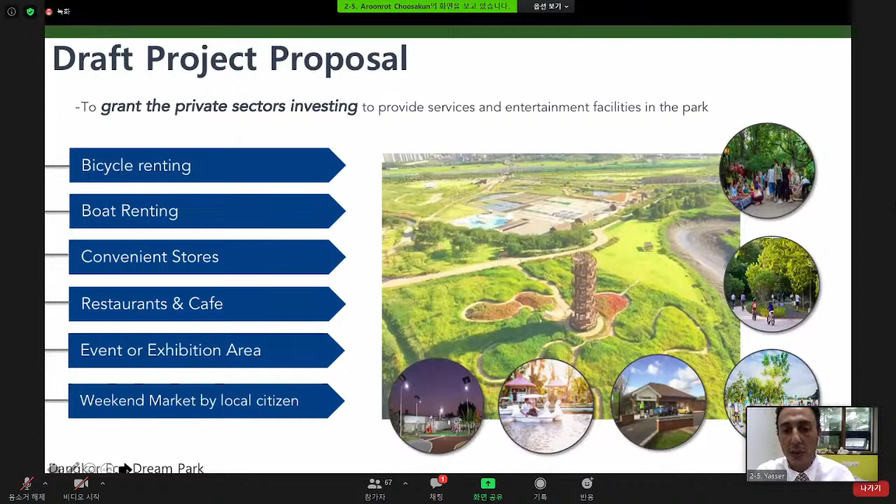To promote the land to the private sector, the government should broadcast the project via various media. Besides, the legal framework for performing business in the area must be clearly identified. The government can propose tax reduction for renting to the private sector and improve surrounding infrastructure to attract private sector investment.

The cost of the project comes from the land preparation and operation and maintenance. For the benefit, the project can obtain benefit from land reclamation, recycled waste, and land renting from the private sector for 20 years. Moreover, some indirect benefits of the project include methane gas production reduction, appropriate ecosystem creation, biodiversity and water quality improvement, and pollution problem reduction.